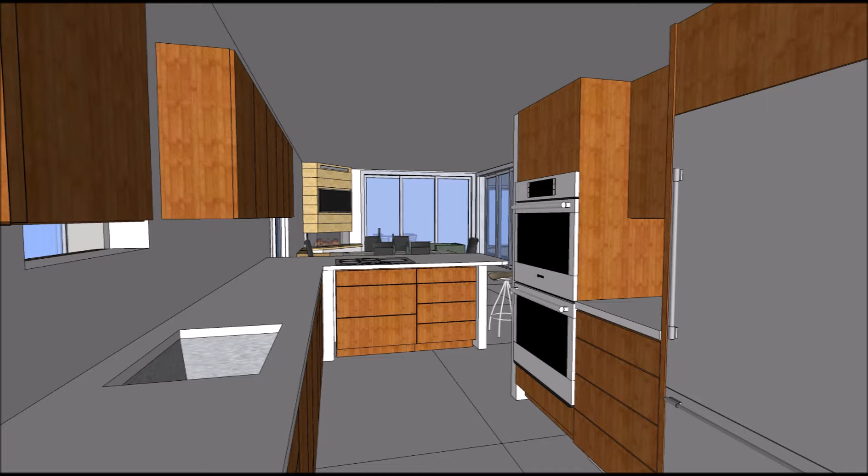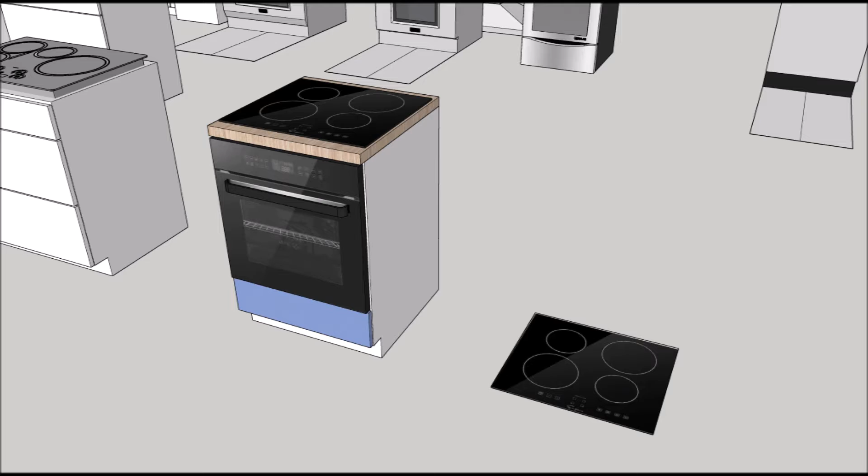In today's quick tip, we're going to build a simple kitchen cabinet to hold a cooktop and oven. Check out the previous quick tip to see how we made the cooktop. We'll be using only basic commands such as rectangle, push-pull, move, and grouping. When we're finished, we'll have an industry standard kitchen cabinet you can use to help you lay out your own kitchen.

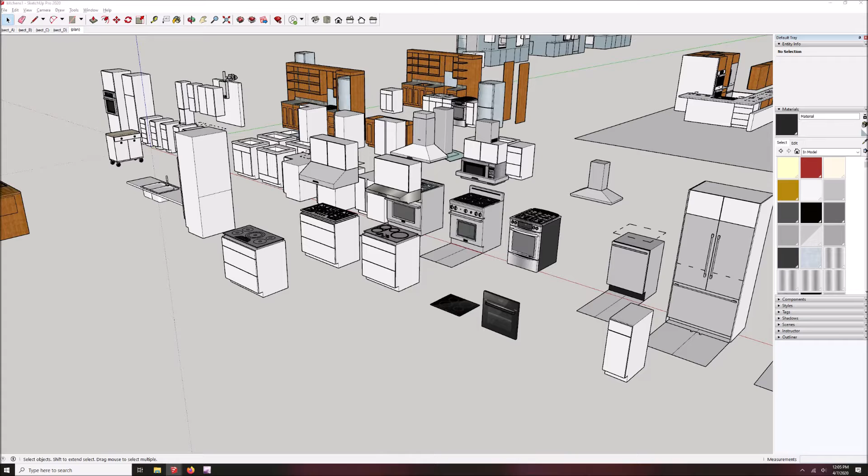So we're going to quickly make a little kitchen cabinet here. I've got a bunch I've already made that I could reuse. I could take one of these and alter it. I generally make them 12 inches wide and then use that as a basis for altering. But I'm just going to go ahead and make one from scratch so you guys can see the steps.

And I'll make it 24 inches wide. It'll be a standard size 24-inch wide cabinet, 24 inches deep, 34.5 inches high. And it'll be designed to take this oven and cooktop.

So we'll start with a rectangle, R for rectangle. Click 2 points, 24, 24. There's my rectangle. I will use P, push pull it up 34.5 inches. And I'm going to go ahead and make it a group.

Now let's double click on it to go inside the group and edit it. I'm going to grab the bottom edge and copy that up. M, Control, click on the bottom corner. I'm going to pull that line up, that edge up 4 inches, so 4. And then I'm going to make the toe kick, P, push pull 3 inches deep.

Now I'm going to make that a group. Actually, one more thing. I'm going to push pull this front surface 3/4 of an inch back.

I'm going to make a copy of that while I've got it. Control C, copy. Now I'll select everything and make that a group, so it's now a nested group. And I'm going to Control Shift V to paste that face that I copied right back to where it was.

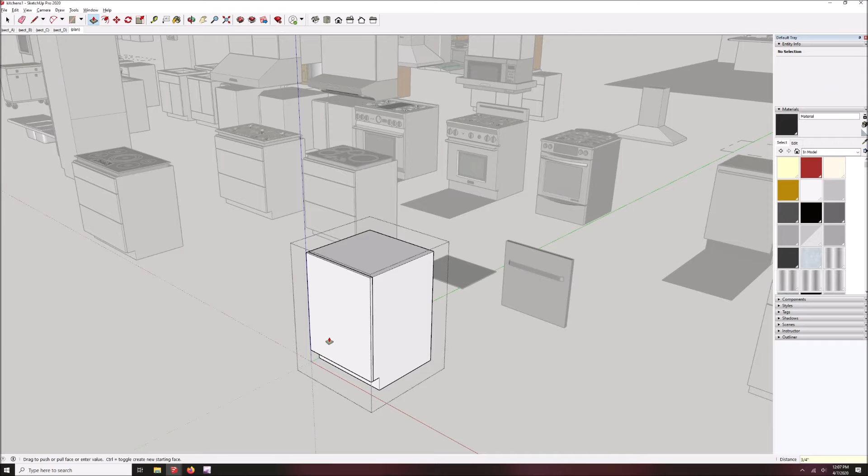You can see the blue line highlighted. I'm going to use P, push pull that out 3/4 of an inch. And I'm going to make that its own group. So now I have the cabinet and the door as 2 separate groups. It makes it a little easier to manipulate them in the future.

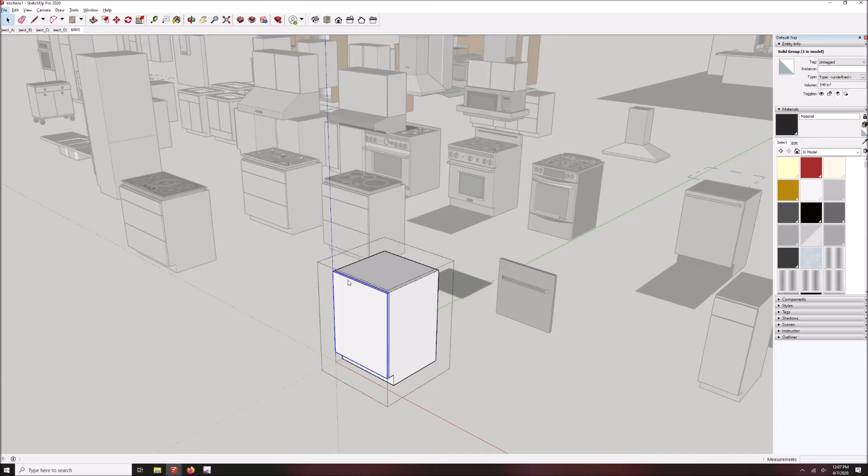So next step. What I really want is a small drawer down here and then the oven on top. And I'm not exactly sure how large to make that drawer, so I'm going to use my tape measure, T, to check the height of my oven here, 23.5 inches.

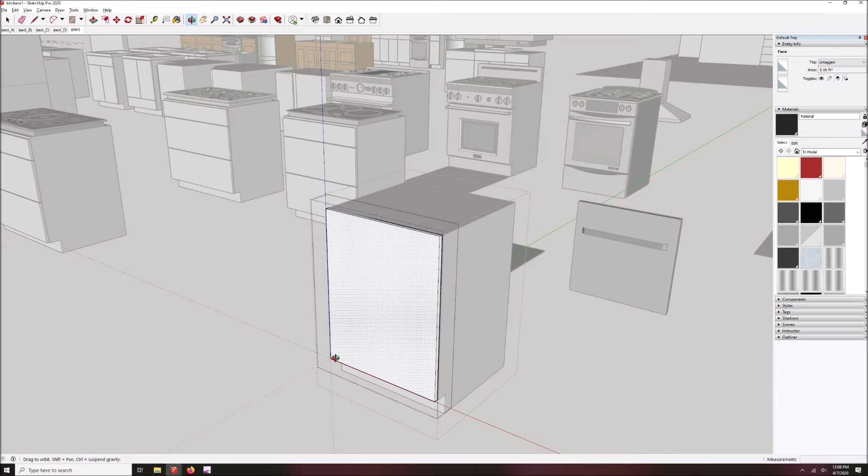So let's take this, double click in here, take this door front here. And the first thing I'm going to do is push pull the 2 sides in 1/4 of an inch because, no, let's make that 1/8 of an inch. Because when I put it alongside other kitchen cabinets, there needs to be a small gap between the door fronts. And 1/8 of an inch will give me, when side by side with another cabinet, that'll give me 1/4 inch gap. That's more realistic. That's basically how the standard cabinets work.

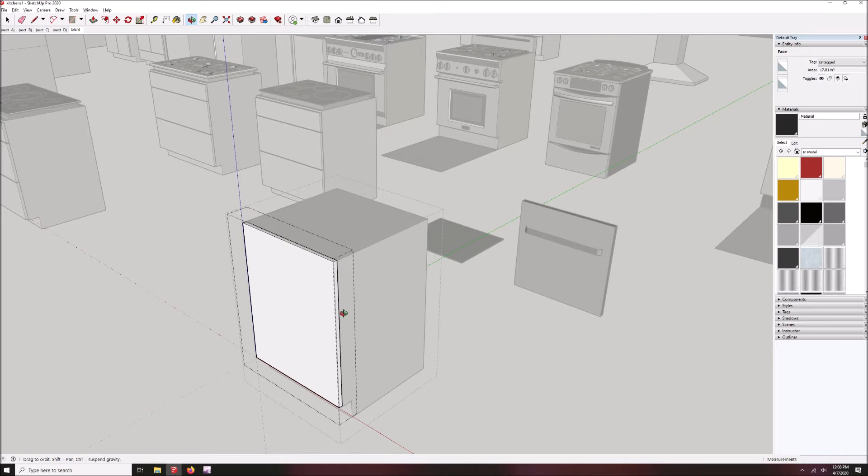And I'm going to need 24 inches over here. So let's start by pushing this top edge down, push pull down 24 inches. So that's my drawer down there.

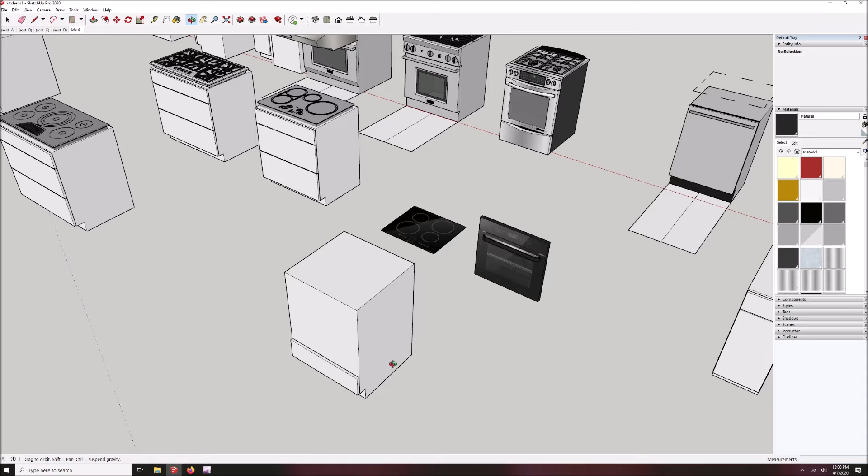Now, the oven is going to go in a hole on the front of this cabinet. I don't really need to make the hole in the cabinet for this model. This is just something I would use as a placeholder in a full architectural drawing package. This is not intended to be for a cabinet maker to make a cabinet from.

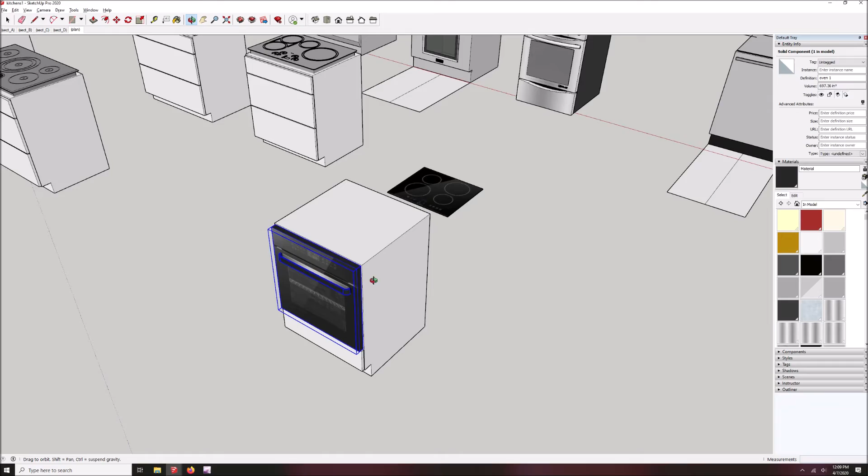So I'm going to copy this oven front, grab the midpoint of the back edge, and pull it to the midpoint on the front edge of this. And we'll move, M for move, down a quarter of an inch so there's a little gap between the top of the oven and the countertop when it goes on. Now it's attached. I'm going to Control X, delete it, go back into my group, and Control-Shift-V to paste it back in place so it's inside my group.

Now there needs to be a countertop on this, and then the cooktop needs to go on top of that. Sometimes I will just go ahead and put a countertop on it right now.

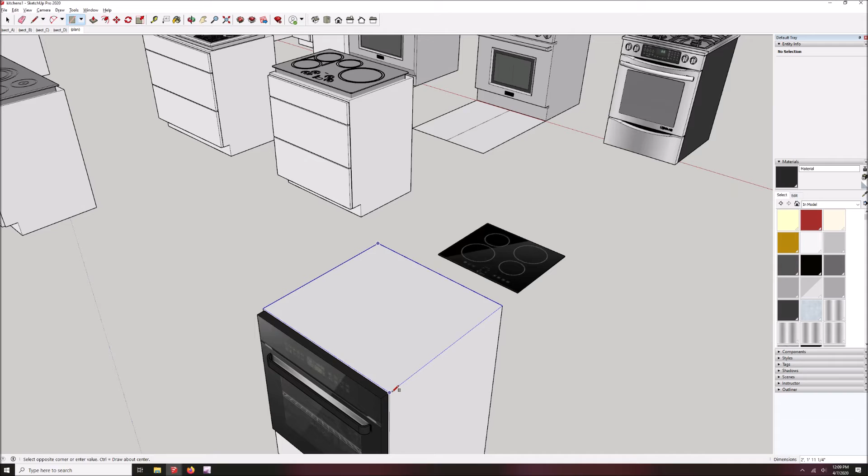So R for rectangle, draw myself a rectangle corner to corner, pull that up 1.5 inches, push pull, and then let's pull the front edge out 1 inch. That puts the front face - oh, that oven door is a little bit thick, that's all right. It's gonna look fine.

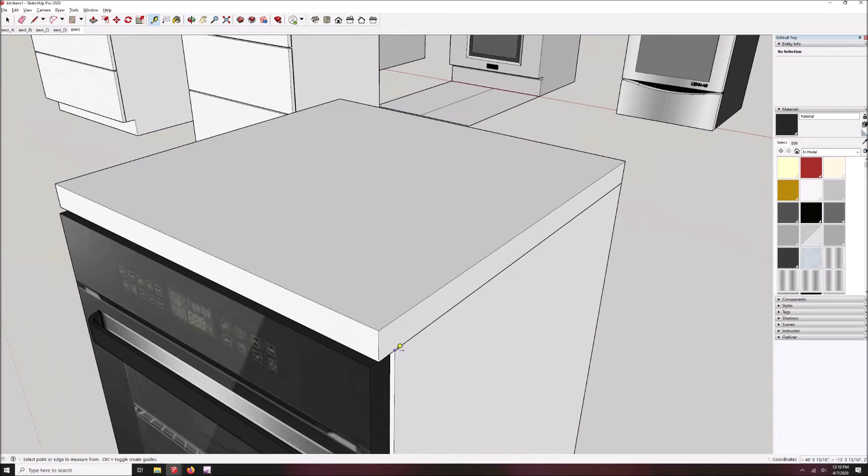1 inch from the front of my cabinet to the front of my countertop is a pretty standard dimension. The cabinet door itself is 3/4 of an inch, so if this were a cabinet door instead of an oven, the countertop would overhang a 1/4 of an inch, which is what I would want.

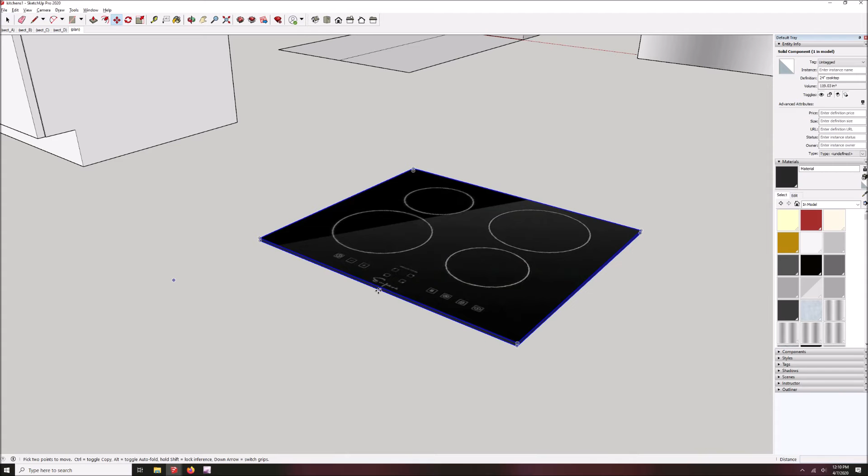Now let me grab that cooktop, pick it up at its midpoint on its bottom edge, and move it with the move tool over to the midpoint here. Then we'll push it back. Let's try 3 inches, M for move, 3 inches. That looks like it's probably about right. Maybe it needs to come forward 1 inch. M for move, pulling along the green axis.

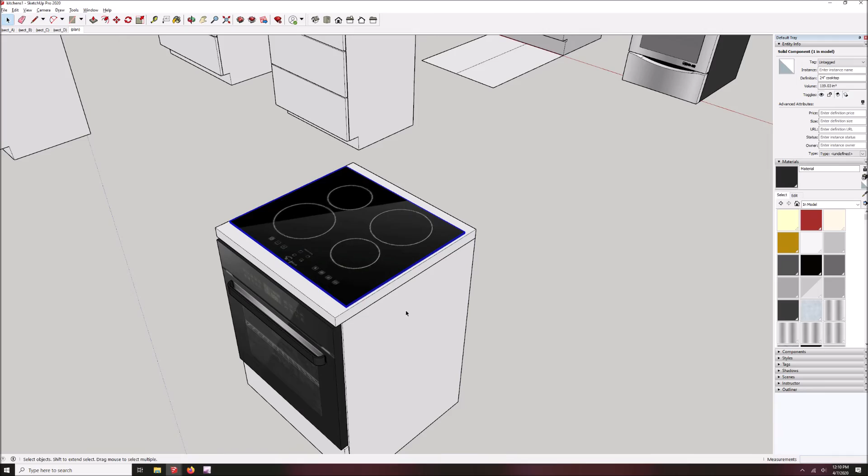So there's a cabinet with an oven inserted into it and a 24-inch cooktop on it. It's got the toe kick in place. It's got a kitchen counter. It's got a countertop. I'm going to make sure all of these pieces are inside.

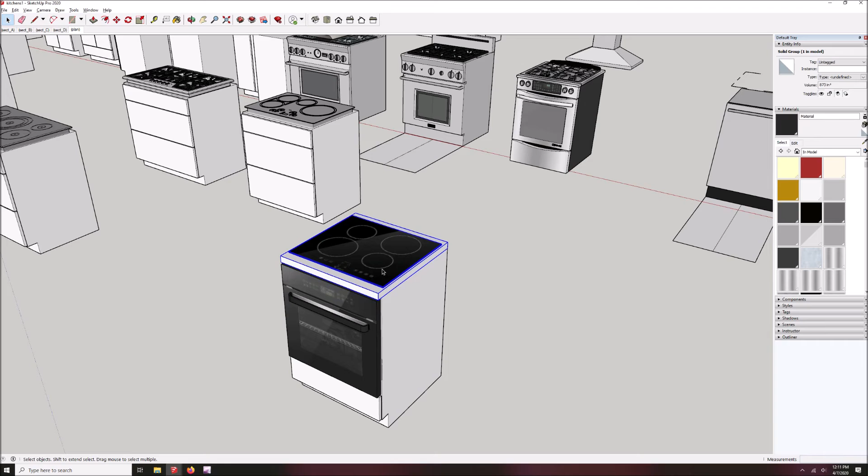Make a group, make a group. Grab them both, Control X to delete them, and then paste them back inside the group.

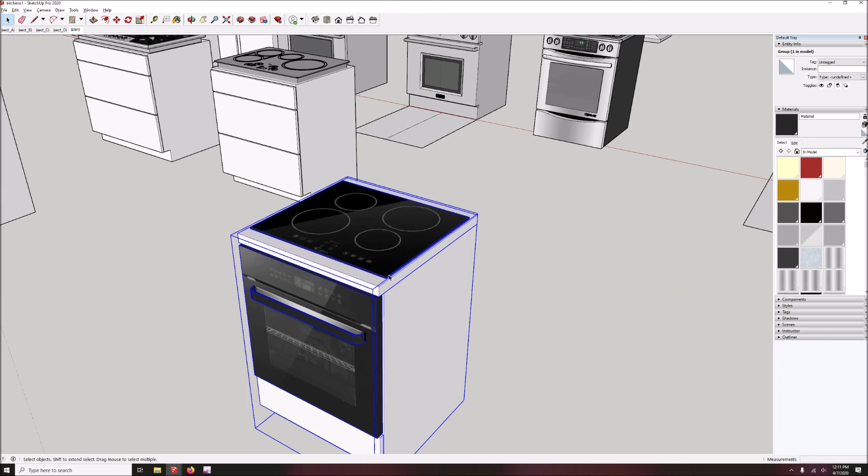Now that's really all we need to do. At this point I've got something I can use. If I'm working on a new kitchen, I can just copy this into my new model, put it alongside the other cabinets, and it gives me a reference. If I happen to want the countertop to be one piece throughout the whole kitchen, which is what I usually do, I may end up just deleting this one. But at least the cooktop is now at the correct elevation, so when I put the new countertop in over the whole area, everything will be where it needs to be. But for now, I'm going to leave it.

That wraps up quick tip number 2.